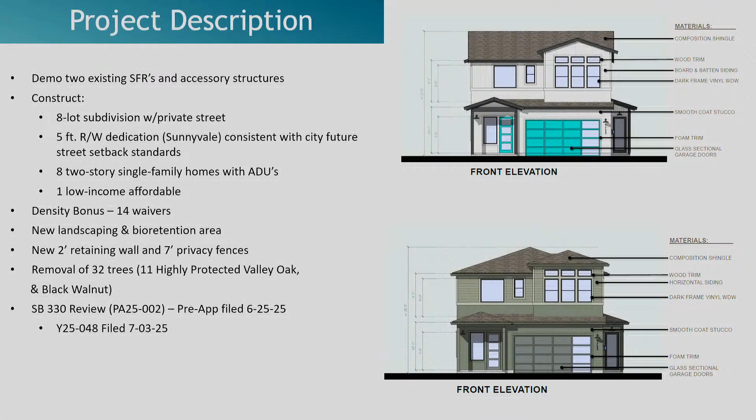So for your consideration tonight at the Planning Commission is the major subdivision, the design review, the density bonus, the tree removal and tree drip line encroachment permits. This project did go to the Design Review Commission as a study session in November of 2025.

At the Design Review Commission, they made the following recommendations: to increase the height of the perimeter fence to 7 feet, the applicant has revised the plans to install a 7-foot fence, which includes a 2-foot lattice along the interface within the existing neighborhood, and to expand the canopy of the trees being planted. The applicant has selected trees native to Walnut Creek with larger canopies and faster growth rates, selecting tree species known for fast growth rates and including some trees as 36-inch box sizes. 2 36-inch box native oak trees have been added to the project.

Re-examining the planting of the gum trees, there was some concern about the native species and their growth rates. The applicant has revised the landscape plan, substituting the gum trees for coast live oaks, Brisbane box trees, crepe myrtles, strawberry trees, and trident maple trees.

Conduct a thorough analysis of the habitat within the parcel. There was concerns raised by the neighbors about the local wildlife. A biological report submitted to staff dated December of 2025 shows that there's no habitat of concern. The mature trees on the lot are old, but they have unoccupied bird nests. No special status species or habitats were found or are considered likely to occur on the site.

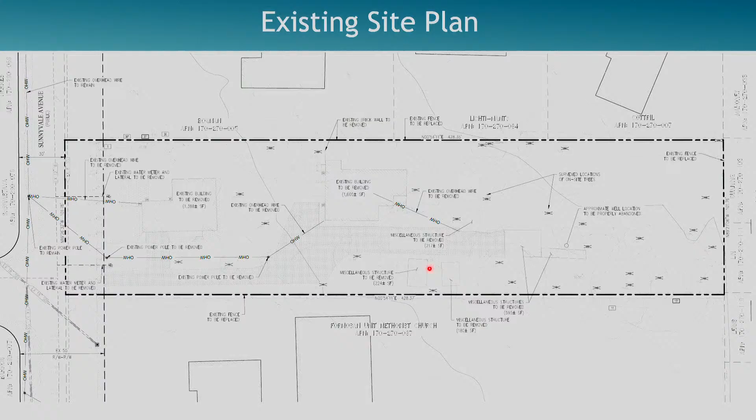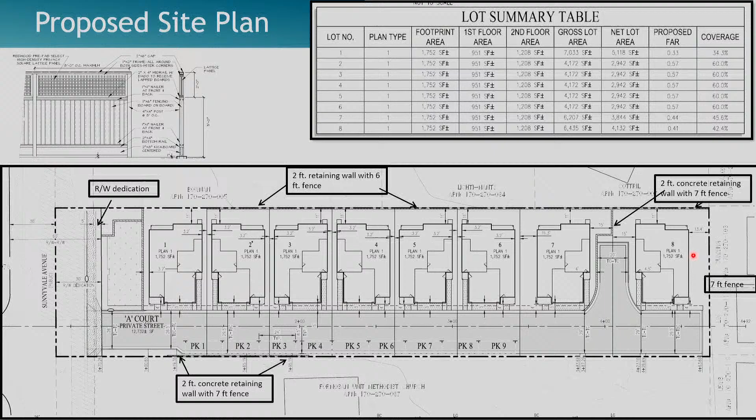Density bonus allows relief from standards that would physically preclude the feasibility of the housing development. Again, the applicant is requesting 14 waivers. The city is required to waive such standards unless it makes specific findings that any such proposal would have a specific adverse impact upon the health, safety, or the physical environment.

These are the 14 waivers that are being requested. I'm not going to go through all of them, just a couple. In the residential 8 zone, the minimum lot size is 8,000 square feet. They are proposing 4,100 square foot lot sizes for lots 2 to 6, which also requires a minimum lot width, lot frontage, and lot depth to be reduced. The minimum rear yard setback in the residential 8 zone is 15 feet, and they are requesting 11 feet.

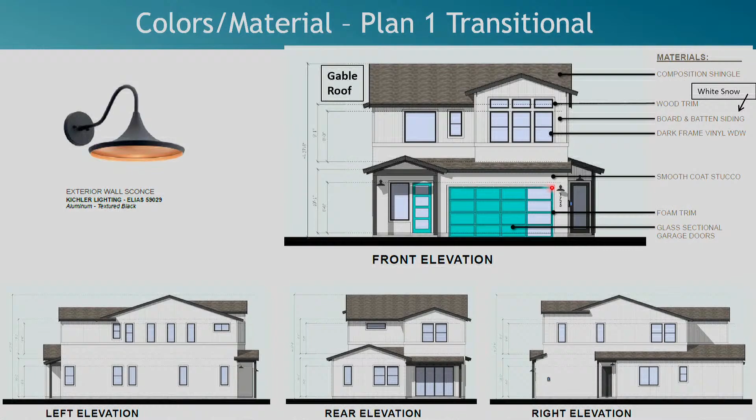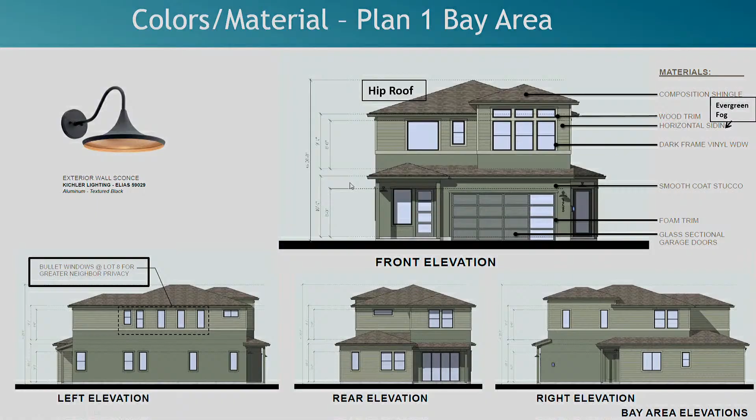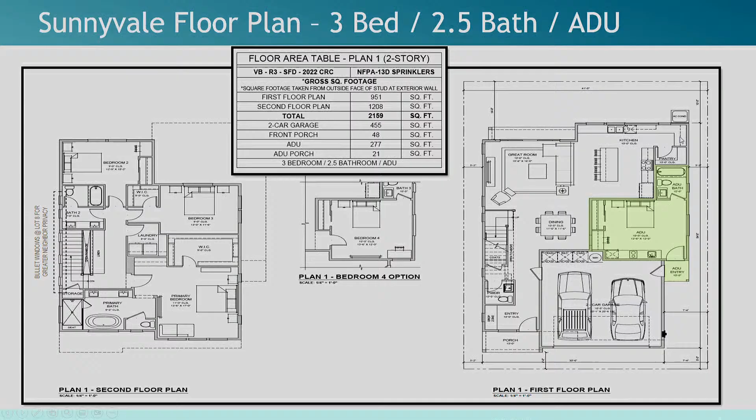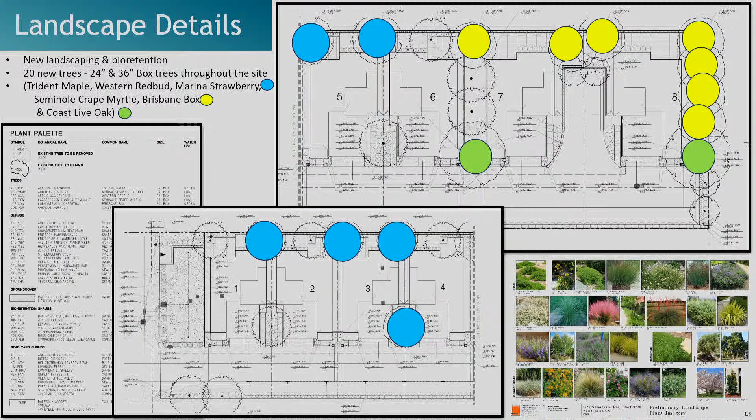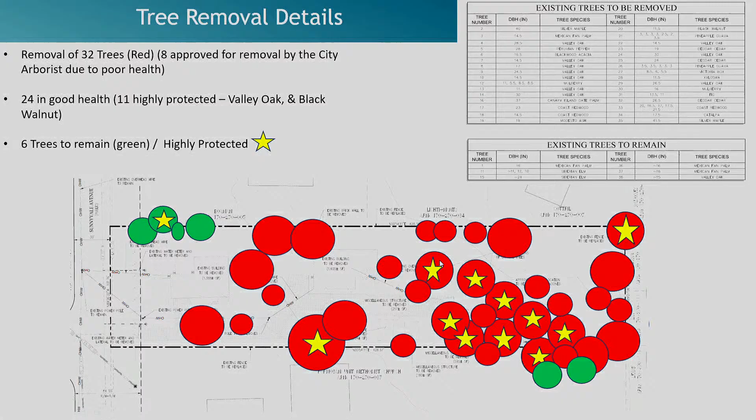These are the tree removal details. The project is proposing to remove 32 trees. The ones in red are proposed to be removed. 8 have already been approved to be removed by the city arborist due to poor health. So 24 are in good health, and 11 of the 24 are highly protected, which are valley oaks and black walnuts. The ones with the yellow are the highly protected trees. The project is keeping one highly protected tree located here.

Staff anticipates using the CEQA 15332 infill exemption. The project is consistent with the applicable general plan designation and all general plan policies as well as the zoning designation, specifically the single-family medium general plan designation and the single-family residential R8 zoning designation. The proposed development occurs within the city limits on a project site of no more than 5 acres. The project site is 0.93 acres and is within the city limits.

The project site has no value as a habitat for endangered, rare, or threatened species, as the biological report stated. It indicates no habitats of concern on the lot, with no special species or significant biological resources found or expected on the site. Approval of this project would not result in any significant effects relating to traffic, noise, air quality, or water quality, due to the small scale of the proposed project. The site can be adequately served by all required utilities and public services, as it is currently being served by all the utilities and public services.

Staff recommends moving to adopt a draft resolution approving the CEQA determination, the major subdivision, the density bonus and requested waivers pursuant to state density bonus law, the design review, and the tree removal and tree drip line encroachment permits. Staff is available for any questions. The applicant, Mr. Doug Cummings, is also here with his team.